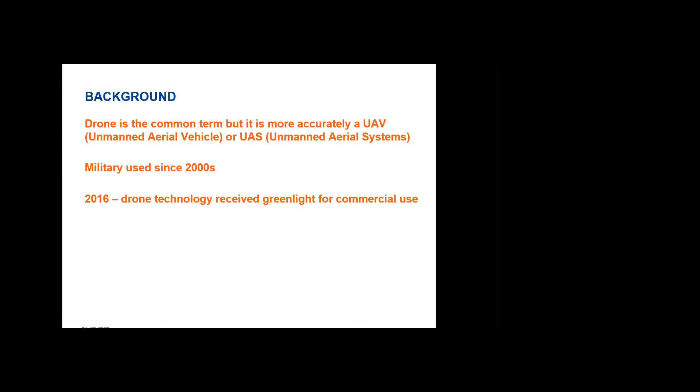And apparently there's nothing unmanned about an unmanned system, because there's somebody man—or womaning—them. UAVs have been used since the early 2000s, but were approved for commercial use about 4 years ago, going on 5 now, in 2016.

In that year, it was found that no state transportation agency was using UAVs on a daily basis. And why would they? It just came out. Now, however, 36 states have certified UAV pilots on staff, and even if they don't have their own pilots, they outsource it.

According to a survey by AASHTO, UAVs are used in some way by public transportation agencies in every state. It also shows a sharp increase in use over the last few years, reflecting rapid adoption of the technology by governments. Other industries outside of transportation using UAVs include farming, real estate, state police, and of course fire and rescue.

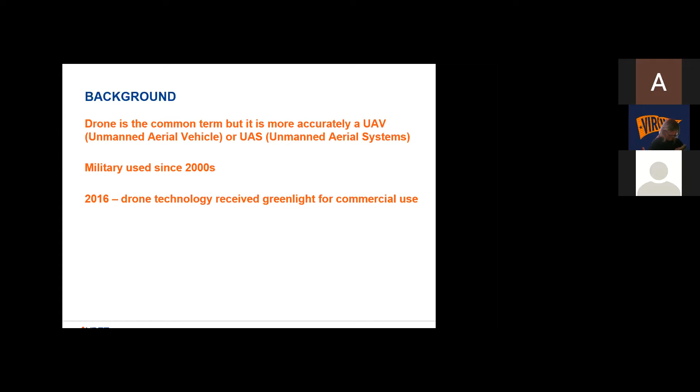There are 3 primary types of UAVs: multi-rotor, fixed wing, and tethered. We'll talk about each one—each has its own strengths, weaknesses, advantages, and disadvantages. It's important to match the capabilities of the type of UAV to the intended application and purpose to get the most benefit. If you need one type of craft but get another, it may not work out—it'd be like fitting a round peg into a square hole, or vice versa.

Don't put any weapons on your UAV—you will go to jail. Although a few civilians have tried, like the instance where someone in Farmville, Virginia, mounted a shotgun on one. And another young man was trying to peep into an older lady's windows, and she pulled out a shotgun and shot it down. They were, of course, arrested for doing all of those things. So do not weaponize your UAV.

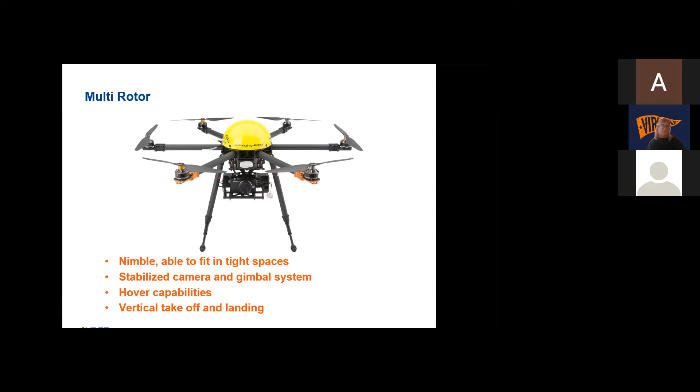In many instances, it is helpful to have a UAV pilot and a camera operator instead of one person attempting to do both. So when you think of car commercials where they show the tires real close to the speeding car, that's a drone running beside that thing, with a pilot flying it and a camera operator operating the camera.

Benefits of this type are that it can cover more area faster than a multi-rotor UAV. Think about an airplane versus a helicopter. Helicopters can fly fast, but they're not going to outrun a fighter jet. It's just not going to happen.

But the downside is that it lacks nimbleness and the ability to hover and execute vertical takeoffs and landings, so you have to keep that in mind. The benefit of this one versus the other is that you may have a short duration because of battery life with the multi-rotor drone, but a longer flight duration with this one.

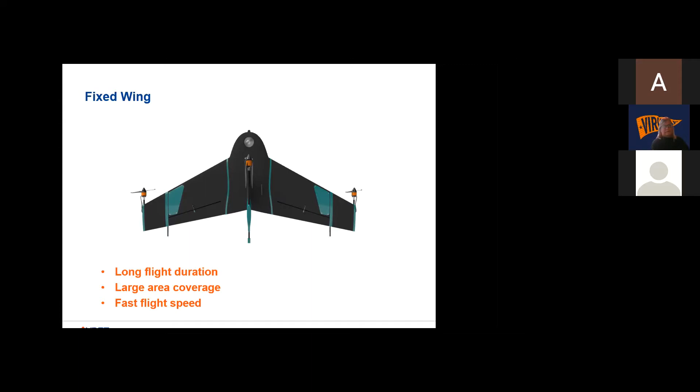Tethered drones dramatically reduce technical and human errors in crashes and flights. Yes, people do crash them. I'll talk a little bit later about our land surveyor program that we started at VDOT. We're coming to the end of the first pilot of the program.

So a tethered UAS or UAV has a reduced spatial area where it can fly because it's tethered. And because of the flying restriction the tether creates and the greater control, their operation does not require a trained pilot because it's not going to go anywhere.

Other benefits include longer flying time due to the ability to keep it attached to a power source. Just imagine you start this thing up, let it go up 150 feet or so, and it just hovers there. Now you can move the camera around and whatever else, but you're kind of limited to your space.

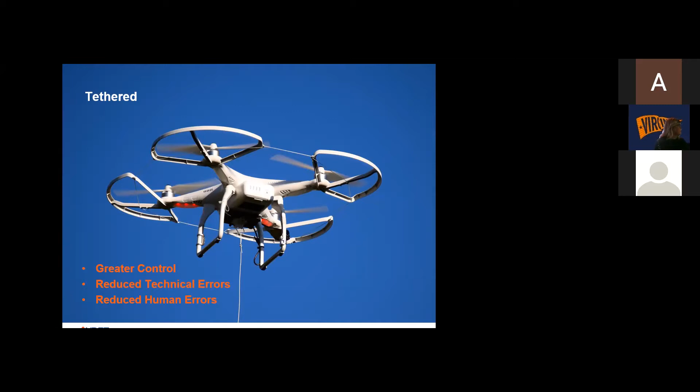So what are the benefits of using a UAV or a UAS? Well, there are many, and more being realized every day. Some of the benefits include gains in safety and innovation, and reduced time to complete tasks.

You know, we say time is money. Cost avoidance, such as reduction in claims using weekly photo documentation, reducing risky activities, inventory control such as the ability to measure volume at multiple stock locations in one flight, hazardous spill investigation documentation, and even work zone traffic monitoring.

So let's take a closer look at a couple of these.

One of the advantages of a UAV is that it is less expensive than traditional solutions. One way it does this is through photographic documentation of project progress. Think of time-lapse photos used on nature shows. So every day or several times a day at certain times, you can go out to the same place, fly up at about the same area, and take a photograph, doing that every day so you can see if we are on pace to complete a project on time.

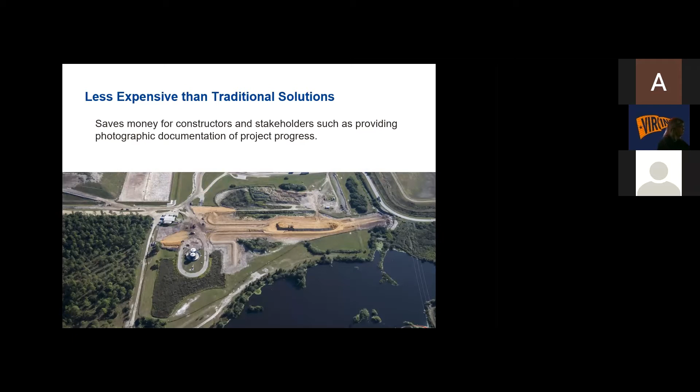Aerial views over a period of time allow for better site management and the prevention of large problems. As the mantra goes, an ounce of prevention is worth a pound of cure.

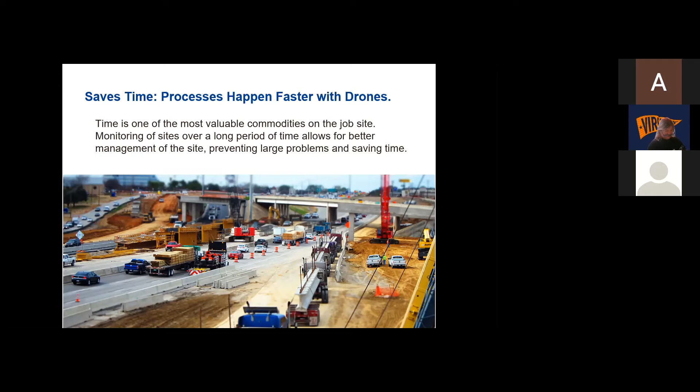As an example, if we are running as an Army Ranger through the woods, and I got Robin out serving as point person with my compass, trying to get her to go through, I can't see her but so long as she goes deeper into the woods, I can't see really what's a mile ahead. But the further I climb up a tree or send a drone up into the air, the more I can see into the future. So if I see a storm coming, or a train coming, or a hole opening in the earth, I'll be able to see that faster than I would had I not had that perspective.

Risk reduction is yet another advantage of using a UAV, as it can be the perfect tool for any job that is dangerous, dirty, or both. And we all know that we do a lot of each of those in Department of Transportation and roadway construction. So monitoring hazards, inventory, obstructions, and potential OSHA violations can be completed much faster than walking the site. I'll give an example of this on the next slide here.

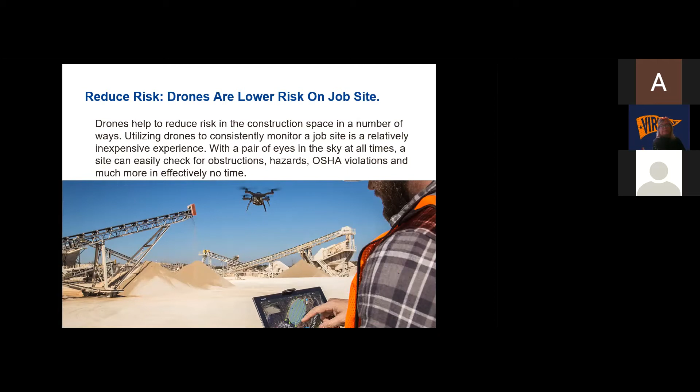It provides utility, especially in regard to safety. So this is a rock slide here. A year or so back, I think close to two years ago, we had a rock slide on I-81 out in our Salem district, and it actually blocked the road.

So that district sent roadway workers out, inspectors, and maintenance operators to start cleaning the debris, because we got to keep the roads open, correct? Well, when they went out there and started clearing the roads, the rocks started sliding again, putting the roadway workers in danger. So the leadership had to pull them out of the way.

So now they were stuck between needing to clear the road, but not even knowing if it was safe to clear it. They said we need to get up higher to see if we're in danger of another rock slide, and they did not want to send anybody up there to climb it. So they said, you know what, we can get a drone or a UAV to go up there. The problem was we didn't have one, and we didn't have a pilot.

Between, I want to believe and remember, it was Radford and UVA. I think they either got the UAV from Radford and the pilot from UVA, or vice versa. But either way, they had to scour from way out in the western part of the region, one college to get a UAV and another college to get a pilot, to go up and do that. And so it actually saved lives, it kept people out of danger, and it let them know it was even safe to clear it out. So once again, dirty, dangerous, or both.

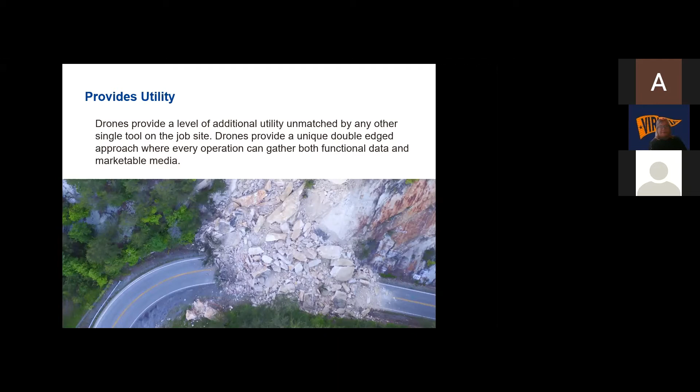So when it comes to ideas for use, UAV use is virtually only limited by your own imagination. Companies are finding new uses for these things every single day. Some examples include North Carolina searching for endangered birds, Utah looking for potential avalanches when the snow season is open, to keep people safe. And Kansas is using them, believe it or not, to identify sick cows by using thermal cameras to record heat signatures on the cows, so they can figure out who to isolate and when to move out, and so on and so forth. So here's a couple of ideas here.

UAVs can measure snow and other elements to keep a real-time check on roadway conditions. They can also measure water runoff and flooding. I know we don't like to see that snow picture here because it's getting close to that time of year, and I think the Farmer's Almanac says we're supposed to have a big snow season, with the first snowfall supposed to be in November. We'll see if they're correct. So get your lottery tickets and your scratchers, and put in your friendly wagers to see if that's actually going to be the case.

Minnesota DOT is using drones to help anticipate where crews might need to spend extra time on repairs during flooding once the waters recede. So once again, just another novel idea.

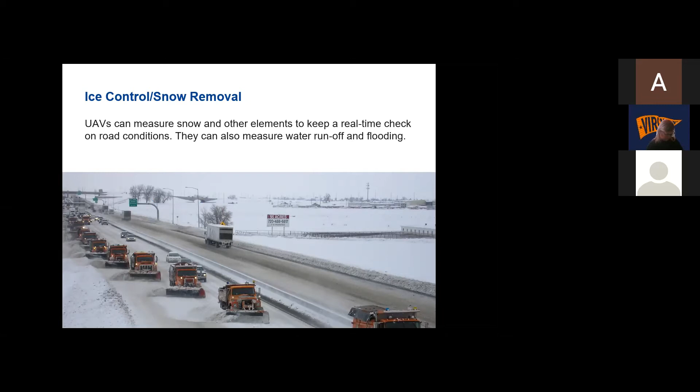UAVs can reduce disturbance to public traffic and road hazard to human inspectors during the survey. So think about your construction inspectors and consultant inspectors going out and inspecting the roads.

Traditional means of road inspection include regular periodic inspection, conducted in order to detect potential damage, performed by people who monitor the roads and infrastructure, acquire images, collect data, and assess the distresses. However, this traditional way of data collection, walking every single mile and meter, has many drawbacks, such as being labor intensive, time consuming, and potentially a safety hazard. Typically, an engineer must walk every inch of pavement while taking handwritten notes that locate problem areas, which takes a tremendous amount of time.

The result is a remediation plan featuring blocked out areas that represent locations of cracked pavement, but there's often an issue as the actual cracks can extend past these areas over time, affecting the accuracy of the drawing. So UAVs can fly over large site areas in a fraction of the time it would take someone to walk them, capturing high quality photos and videos of paved areas with incredible detail. That's another use and idea for UAVs.

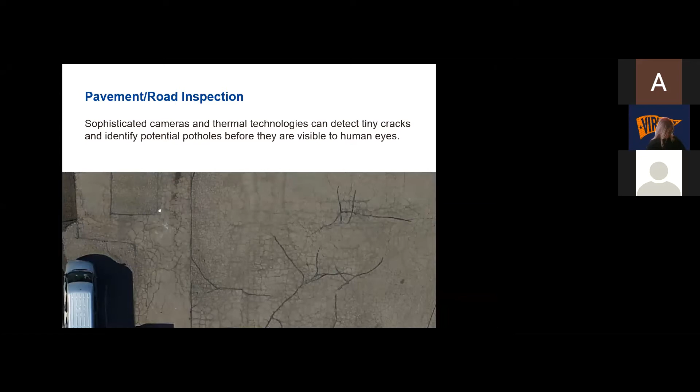Bridge inspections and structure inspection is another one. Bridge inspectors currently rely on rope systems and special inspection vehicles, talking about aerial lifts, to assess obscure or dangerous areas. So imagine getting underneath this bridge here.

Nebraska DOT wanted to explore the use of drones to see if better quality inspections could be achieved with increased safety to the public and inspectors, yet in a shorter period of time and with less cost. So considering the potential benefits, they piloted this project to further evaluate the use of drones for bridge inspections.

I think it's Montana DOT that estimates a standard bridge deck inspection takes 8 hours with a crew of 4 people and heavy equipment, costing an estimated...

They estimated that a standard bridge deck inspection takes 8 hours, with a crew of 4 people and heavy equipment, costing an estimated $4,600. The same inspection with a drone takes 2 people, just 2 hours, at an estimated cost of $250. So just some comparison there.

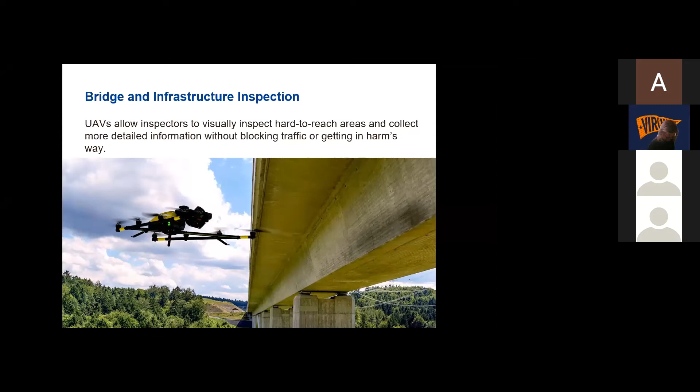Traffic monitoring: UAVs are becoming an attractive solution for road traffic monitoring because of their mobility, low cost, and broad view range. They can be equipped with different types of payloads like high definition cameras and thermal cameras for day and night surveillance. They can also provide on-the-ground situational awareness in case of emergencies like road accidents, oil leaks, etc. They can also collect evidence for the same. The data collected can be analyzed to improve traffic flow and safety.

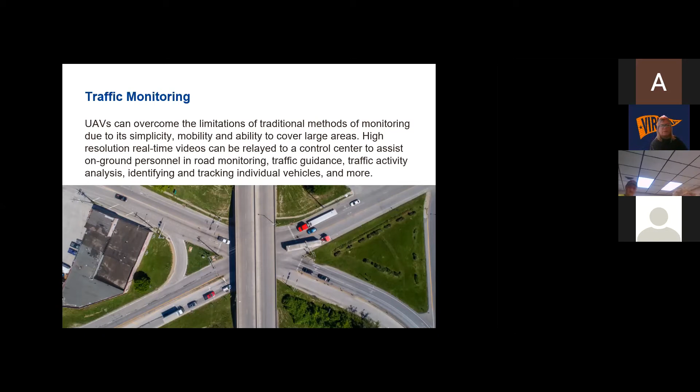Imagine if there's an accident on the road, or even if somebody passed out in a gym or grocery store. The first thing you want to do is assess the situation to see if it's safe for you to come in and provide assistance. UAVs can actually help with that. So when disaster strikes, this is yet another way that UAVs can assist.

The more officials know about an impacted area, the more effective their response. Because UAVs can be quickly deployed over a disaster zone, responders are using them to produce 3D maps, scan for victims, and assess damaged infrastructure. These, among other applications, have cemented the role of UAVs as an essential part of emergency disaster response.

I know in Virginia, the state police have been incorporating them quite a bit to clear accidents much faster than they could without them.

Responders use UAVs to provide rapid situational awareness with the mapping technology and imagery just mentioned. They help firefighters identify hot spots and assess property damage, capture imagery for communications and news coverage, search for survivors, and create before and after maps of the impacted areas.

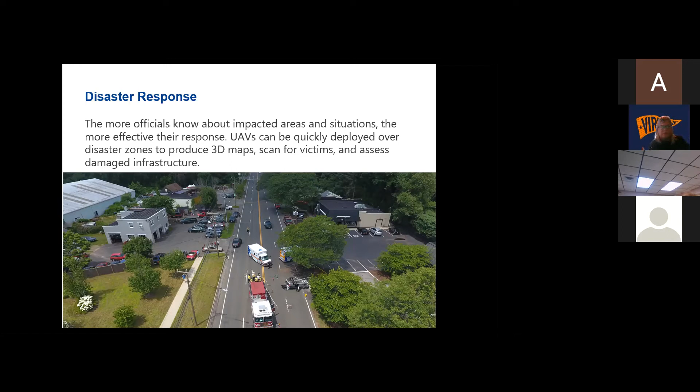Jamie, we have a question: how do you get around restricted airspace issues in an area, such as the Nova district? We're going to talk about that when it comes to administration. There are some ways to get around some of that, but with the airspace, it's going to come down to licensing, training, and getting special permits at certain times. We'll talk about that in the administration part.

But that's actually a good question. And when I developed this presentation, we're going to give all the good stuff, but there's always that downside of it.

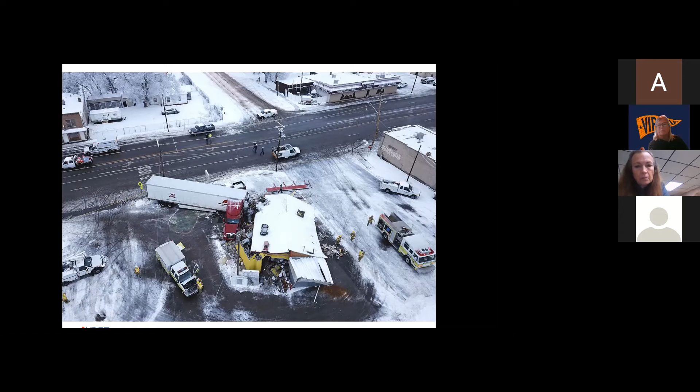When surveying challenging terrain, UAVs make it no longer necessary for human operators to physically assess and measure points in hazardous or difficult to reach locations. We're going to always need surveyors, but in clear areas where it takes so much time to do it, this can be a good tool in their toolbox.

So while traditional surveying methods require meticulous measurements, preparation, and planning, UAVs can capture comparable data in dramatically shorter timeframes.

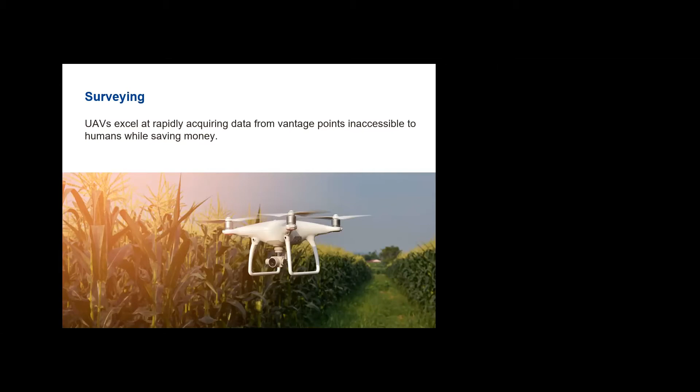So 2 years ago, I was taking a look at our agency to determine where our risks were. And we started looking at surveying, and we realized we had a lot of people that were well over 30 years that could walk out whenever they needed to. But we didn't have a lot of people that could replace it because it's a highly technical job. And we started looking at the agency, and we created an apprenticeship, a holistic apprenticeship model.

And we started looking at which occupations should become apprenticeable or considered to be apprenticed. So we looked at, okay, does this occupation have high turnover? Well, we didn't, and they stayed in the position for a long period of time. Is there potentially mass exodus of retirement? Possibly. So that's another reason for us to start this land surveyor technician pilot program.

Is there a lack of a community college or university program at the time? Yes. Is it highly technical and takes a long time to get somebody up to speed? When you consider it takes about 5 years to get someone licensed as a surveyor, we were already kind of behind the times. Our land surveyors actually go through the UAV piloting process each year in the apprenticeship program.

Now, granted, we have to bring in someone from outside because we're not allowed to use our own people to do so. But we actually got a couple of them who are already licensed to fly the drones.

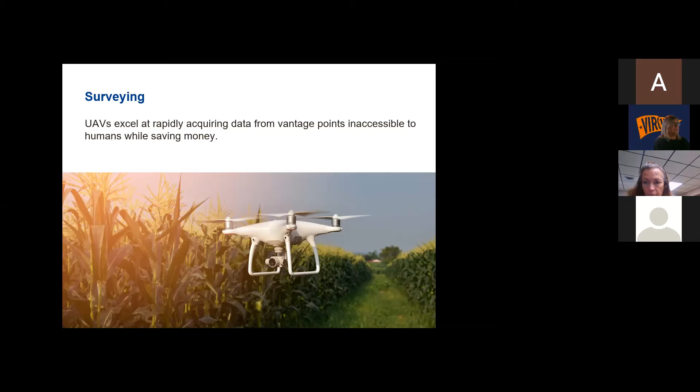So now, as we move into this third phase of the presentation, we're going to start talking about some of those considerations that one of the people typed about.

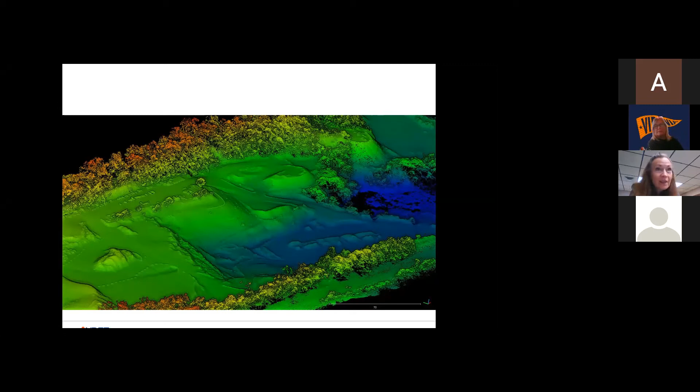We've talked about how UAVs and UASs can improve processes, improve accuracy, improve speed and effectiveness, reduce cost and risk. However, a successful program is only as good as its planning. All that information is great, but you got to get the UAV. There's a lot of things that you have to have in order to do that.

So before we move on, using your chat box, what are some things that need to be considered before implementing a UAV program? Except for that one gentleman who already had a good question, so he's off the hook, or she's off the hook, whoever wrote that.

So I'll give that a couple of a minute or so, I guess. Hopefully people are typing in something. And if not, then we'll move on.

Anything coming through, Alexis or Robin? I'm sorry, can you repeat that one more time? Yes. Has anyone used the chat to share some things that need to be considered when purchasing, implementing, and managing a UAV or UAS system?

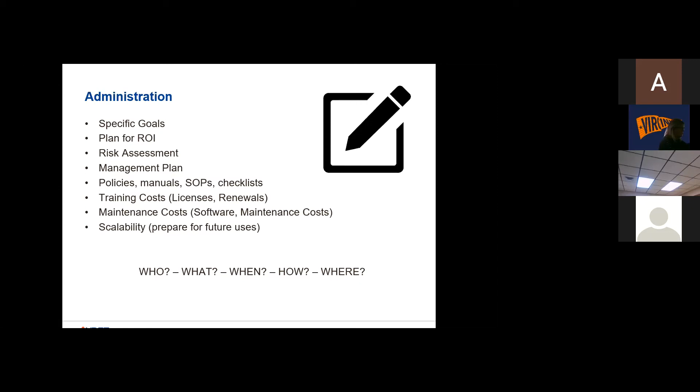Costs and budgets are a very, very big part of this. A lot of people mention that, but the budget should include all financial factors — not just the selected aircraft, but the estimated maintenance costs, pilot training, licensing, insurance, and additional batteries, to name a few. And oh, by the way, you're going to have to get new propellers on these things. And what about all the software? Yeah, it's nothing without the software.

Because now you've got all this fancy information, and you need to transfer it somewhere. You're going to need the space for that, and you're going to need the security for all of it, and determine who has access to it.

Some selection criteria as it relates to the type of UAV: at the moment, DJI is the current leader in commercial UAV manufacturing and is preferred by many companies and organizations. But others include Yuneec — I should have put that on the screen — Uvify, Hubsan, and Parrot.

You want to consider your payload — infrared, thermal, still photographs, video HD, 4K. You also want to consider the flight speed at which all images and videos will remain clear.

If you got a fast drone and a slow camera, that doesn't match up very well. We talked about software. You're going to have fleet management if you got more than one. This is going to allow you to keep records and set job specifications.

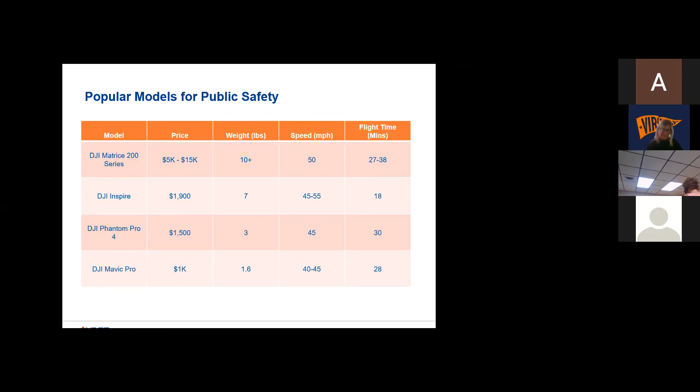Then you got the Inspire, that's $1,900, 7 pounds, still 45 miles per hour, but look at that flight time — it's almost cut in half. So you get what you pay for to some degree. You want to match up your budget, your restrictions, and what you plan to do with something like this. The Mavic Pro, you hear that a lot — that's $1,000, very, very light, 45 miles per hour with great flight time. So just some things for consideration.

So here's just a cost-saving example as we're near the end here. Conventional method of surveying on the left, and drone implementation on the right — this is from one of the DOTs. The conventional method had 42 surveyors at $1,200 a day for 15 days, costing $378,000. Once they implemented the drone just for the surveying, they had 7 UAS pilots, many of whom were the surveyors, at $550 a day and half the time.

That came to $34,650. So the drone implementation in this instance realized 83% fewer staff, a 54% per day reduction in spending, 50% fewer days, and a 91% decrease in total costs. Now please note that the first year savings will not look exactly like this due to the cost of equipment purchase, setup fees, software, licensing, and so on, if you were to do it in-house. But this is an example of when they went out of house.

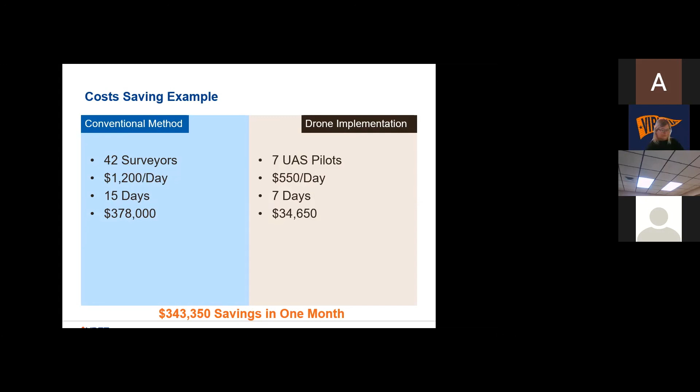The one thing I really want to hammer home here, leaving 4 or 5 minutes for questions, is that you want to start small and build from there. I like to tell my people all the time, you don't have to hit a home run — you just need to get on base.

If you're familiar with Agile as a development system, they're not trying to knock it out of the park every time — they're trying to get further ahead at each iteration. And that's the thing I want to hammer home here. You don't have to go out and spend all the money and stress over having all these things, but if you have clearance from your organization to do so, start small and build from there.

Remember that your current state of work outcomes, where you are right now, plus enabling technology with UAVs or other technology you can think of — like Zoom or Teams or whatever else — will always equal your future state of work outcomes. So the question becomes, what are your future state work outcomes, which will help you determine which technology you need to enable or implement.